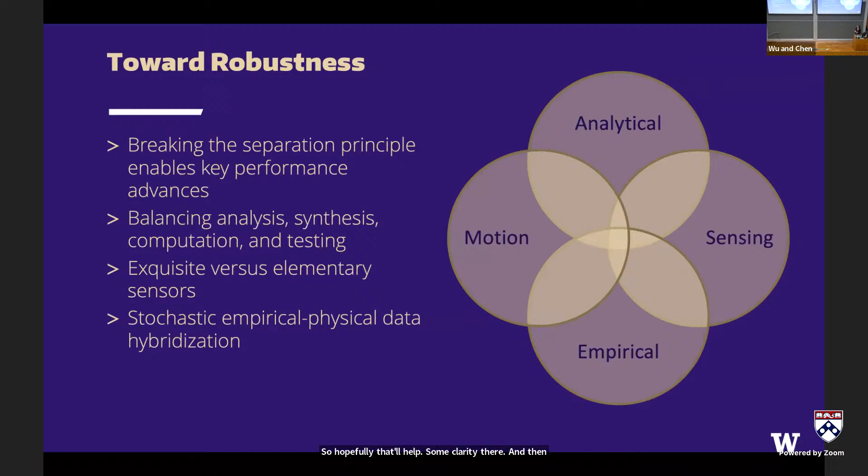And then toward the end, I'll talk a bit about how we can get into some stochastic pieces of this work. Okay, so the high level piece here is: what is observability? That's going to be the linchpin for everything I'm talking about today.

The general idea is this is our standard block diagram, feedback loop for a system. So you've got whatever dynamics model of your system right here. The state is going to come out of that in some sense. There may be disturbances coming in.

So you've got your controller you're applying to your system. Disturbances can come into that, go into the system. There may be uncertainty in the system. When you do measurements down here, there's noise that comes into that. And then you get your measurements out.

And then from those measurements, you apply an estimator or a filter or some sort of tool along those lines in order to extract back out the states. So that X hat is the estimate of your state, and that sigma is the error covariance.

That sigma is very important because it tells you how well you think you know that estimate. Because of noise, you're never going to know that estimate exactly. And because usually your measurements, there's not a direct inversion, that error covariance, how tight that is, will go back.

As you control your system relative to what you want it to do, when we design controllers for robustness, we're trying to be able to handle as much uncertainty as we can. And if you have eaten up a whole bunch of your capability with a very messy estimator, so your sigma, your error covariance is very broad, you're going to eat into your uncertainty.

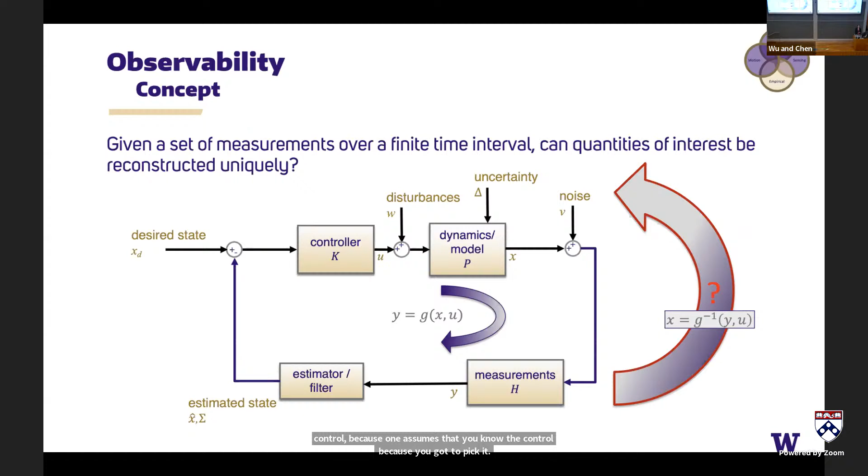Okay, so how does this work? I'm going to go through some of the mathematical pieces here. This is an analysis thing, and this is just looking at the sensing side of it.

So that's why the little bubbles are colored over there. Again, it's the first time I've tried little bubbles. We'll see how it works.

So in a linear system, this is your standard continuous time linear model here: X dot equals AX plus BU, and Y equals CX.

One way of thinking about observability in these systems is if you start taking derivatives of your measurement, these numbers represent the number of derivatives you've taken, and just write out what these equations look like. So the first one's just Y equals CX. This X is the piece we're going to try and extract out of the system.

Take a bunch of derivatives, gather up all of the coefficients of X, and then shove all the other stuff off into this vector on the right. If you notice here, all the things in this right piece, we know all these things, assuming you had some idea what your model was at the beginning and that you chose the control. And then we also assume we know the measurements because we measured them and took derivatives.

So if you had to do that numerically, that is totally fine. We assume we know the C and CA and all of that there. So the one thing we don't know is the X. And observability in linear systems, regardless of all the different tools you may have seen, kind of boils down to this in a certain sense.

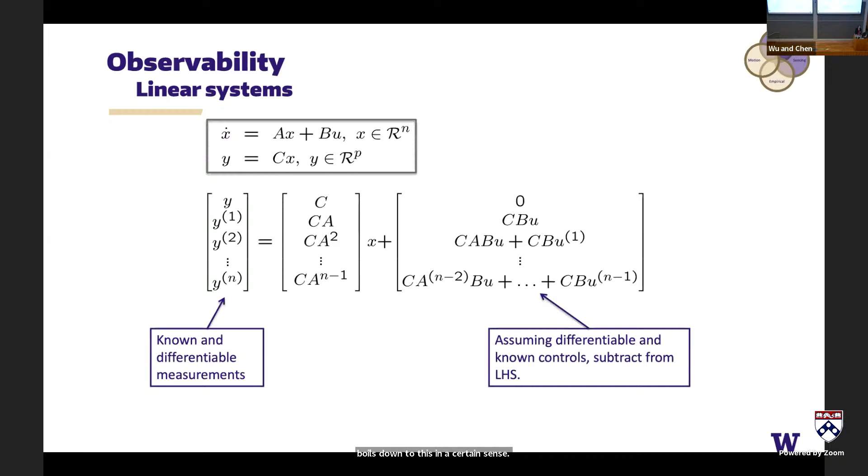So those pieces are known. These things, we assume, are known. We assume this is known. And so then we just want to know, can you invert this relationship? You can subtract off this vector on the right from the left.

And then it comes down to, does this matrix here have full rank? Because if it's square, you might be able to invert it, but usually it's not square. So all of the pieces there, nothing here depends on or is affected by whether or not the system's controlled in a particular way, because you're just subtracting that piece off. So when we talk about linear systems, there's what's called the separation principle: how it's controlled doesn't have any impact on whether or not you're able to extract the states out of the measurements.

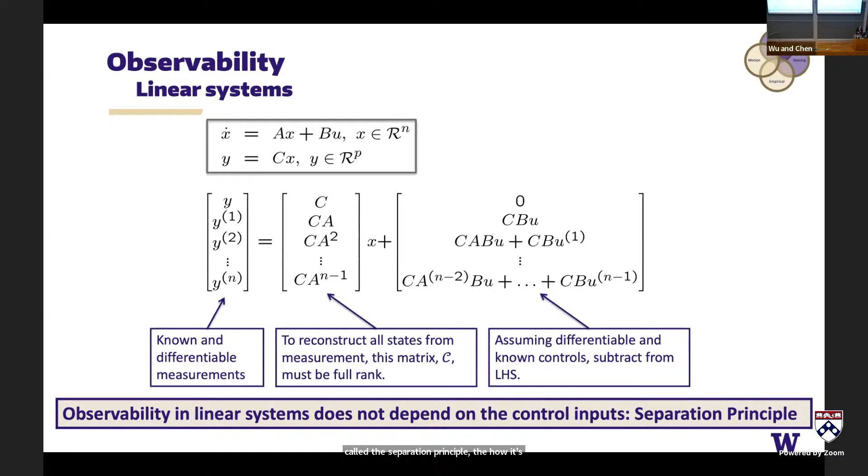Okay, so it's a little bit different in nonlinear systems. This is where I've got that other bubble colored in, because the control may matter. So...

If you write down dynamics in a similar way as with the linear system, except now I'm going to frame it a little differently here: this is like the AX in a linear system, this is called the drift in a nonlinear system, and these pieces over here are the controls.

This is like BU if you pull it apart in similar structure, except that the elements of what would have been your B matrix in the linear system may be state dependent, and may also be time dependent. So you can break apart these pieces here. Often you'll see it written this way, or you can lump them all together into one big dynamical systems vector.

And then you're going to have measurements. The measurements are often going to be state dependent. A good example of this is in a robotic system, we often have sensors on board getting body-fixed measurements because you've got a camera on board. That's getting measurements relative to the motion of the system, so that's going to be a function of the state.

More broadly speaking, if you go through, as with linear systems, a similar process of taking these time derivatives of the measurements, you'll get a structure that looks like this vector here. So this is just taking time derivatives, and it works out to look like this when you do your full derivative. If you then write this in terms of this function f, then you can rewrite these.

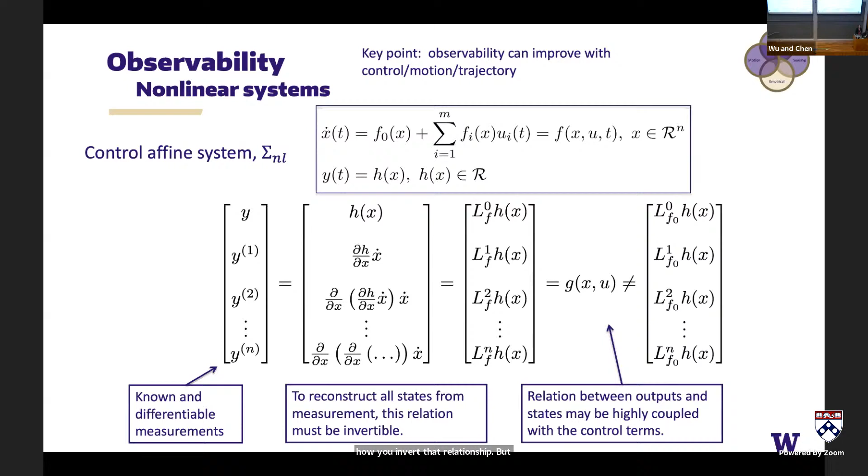Going back to that first diagram, there are some tools around this. It really boils down to when you locally look at that function at some point, you take a Jacobian of it. And if the rank locally is full rank, then you're good to go and you can invert it. So that's boiling down a whole lot of math into that.

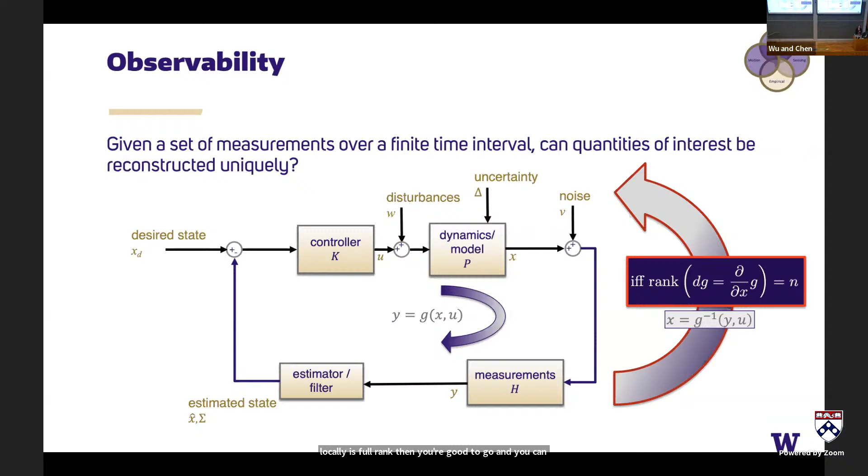Let's see that a little bit in action. I'm not going to show all the calculations of the different ways of calculating that local representation, I'm just going to show you some examples. So one that we can actually do the analysis on - and that's why I've got the analysis and the motion bubbles in here - if you look at a very simple model of a drone.

This one here is the Aerosonde. It was the first autonomous vehicle that flew across the Atlantic, from Canada over to Scotland back in the 90s. And it had, no joke, like the equivalent of a lawnmower's worth of gasoline in it. Very seriously, I think they sent about 5 of them and 2 of them made it, which is mind boggling that it actually worked.

Particularly since the sensors they had on board - they had differential GPS, but they didn't have wind speed sensors. So you've got a GPS sensor on there, but you have no idea what the winds are doing. And this thing is small and it's going across the Atlantic. I think they did it when it wasn't awful bad weather, but still.

So the way that, if you stop and think about it, you can figure out doing course correction from the wind is you can do these sweeping motions and get some idea of where the wind pushed you. So those sweeping motions are in effect this very need for doing motion in order to get observability of the full state.

So if your full state is, just thinking of it in the plane, although you can do it in higher dimension, your position, your heading, and then the direction of the wind - the X and Y, lateral, longitudinal wind direction - put all that into a model, so a 5-state model, which is about as simple as it's going to get. Write down just very simple dynamics so you can control velocity of the vehicle, and then the heading. That's basically what you get with a drone of that type.

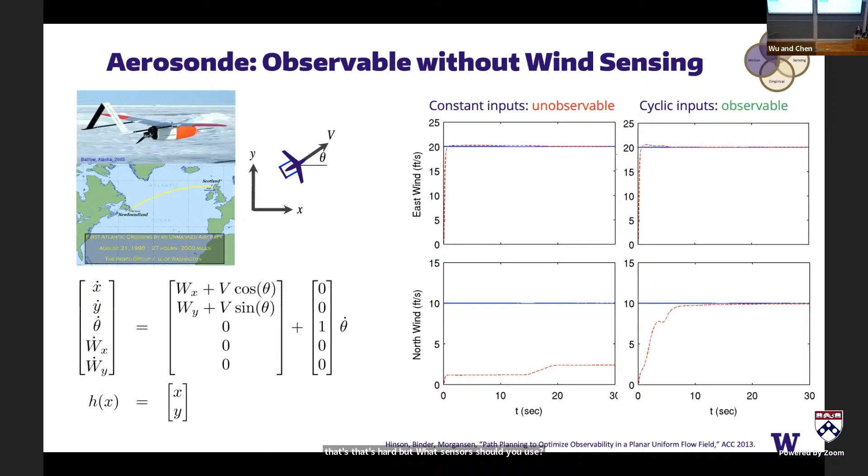Where should you put them so you make this locking on of the estimation as quick and tight as possible?

So some of the things that come up with this tool - up till there, it's pretty much analytical tools. I swept a whole lot under the rug about how do you even do these calculations. That one example I gave you was a 5-state system, and even with that one, it gets pretty complicated to do the analytical math on it. Real systems are not that easy.

So the two I'm going to show here, and I'll talk about the ways we're looking at handling each of these. The one on the left is talking about analyticity. Those models I showed were differential equation-based models, and in order to use the tools, you have to be able to take derivatives of your system and evaluate those derivatives at the points of interest. In a lot of systems, you can't do that.

So in this one here, this is completely something different. This is a classification problem where you've got people or cars moving around or both, and you're trying to figure out what's where. That is not usually written out as a differential equation or anything of that type. And so trying to use these tools, which actually do have application here, where you're trying to extract out from this camera image what are all the objects - that particular observability tool won't work. Just it's not built to.

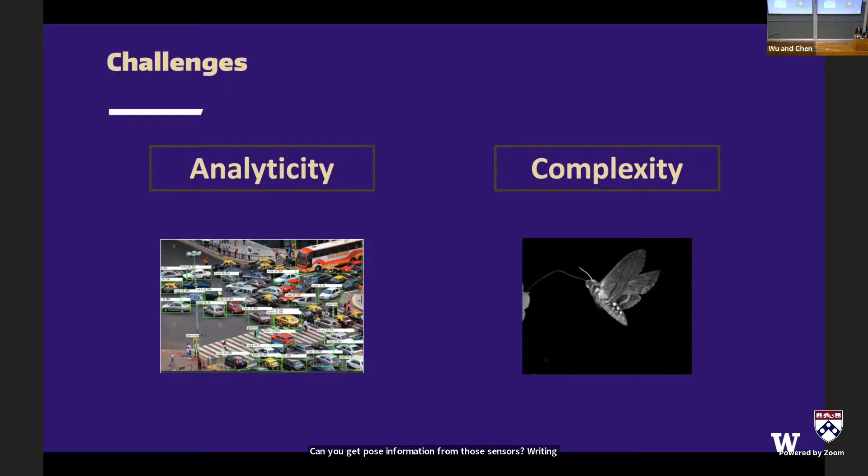And then there's complexity. If we get beyond a sort of simple set of those kinds of descriptions of a system, what do you do? I'll talk more about this one here. So this is a hawk moth flying around. And what we've looked at with biologists is they have strain sensors built into the wings, like 200 of them in each wing. Can you get pose information from those sensors? Writing down the dynamics on that is really hard. So what do we do?

One thing you can do is do a local linearization about a nominal trajectory and then evaluate that local linear system. So this is an analytical piece right here. All of this you may have seen in a class you took on control theory. The parts I want to point out - so this is what you get.

So you have this nominal trajectory here. And this is a bad notation thing - often we refer to a system as sigma, but that's not the same sigma as in the error covariance. But you get this linear system here. It's often time varying, because when you linearize about a moving trajectory, you often end up with a linear time varying system.

It turns out your nonlinear system is going to be locally observable about that trajectory if this matrix W down here - if you look at the output energy of your system, so 2-norm of your measurement function, it expresses out like this in a linear system format. And so this whole integral here in the middle, which is from your start time until when you stop taking measurements, and then you're going to extract out the state at time 0 - if that integral, which is a matrix, is full rank, that's called the observability gramian. If it's full rank, then your system is locally observable. That's an analytical result for local nonlinear observability.

It turns out you can re-express this whole gramian here as a sensitivity function - the sensitivity of your measurement relative to that initial state, which is really what we care about. Think about that: if your system's observable, it's going to be very sensitive to that initial state, meaning that if you change the state, you will change your understanding of the initial condition. If it's not sensitive to it, you can make that initial state whatever you want and you're going to get the same output. That means unobservable, because multiple things are giving you the same answer. So we want high sensitivity here in order for our system to be well observable.

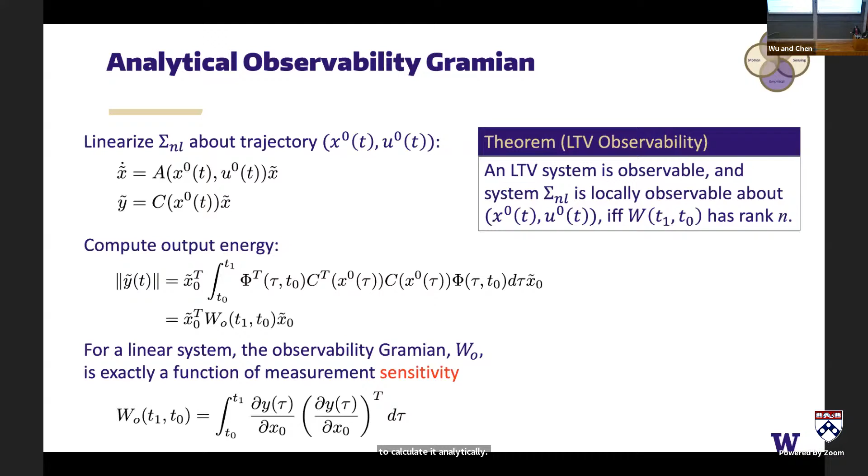But having framed it in this particular mathematical structure, we can actually construct this sensitivity using numerical tools and then get a version of this gramian using simulation rather than having to calculate it analytically. It's a trade-off between having to do a whole lot of math you might not be able to get a solution for, versus having to run a whole bunch of simulations.

So, no free lunch anywhere, but it does make progress. These are tools like this empirical gramian that was developed by other people. Some of it came from doing model reduction. Sanjay Lall and company did some work on this a while back, and Art Krener also did some of the underpinning development here.

So we didn't develop this ourselves. We've built some things on top of it. I just want to make sure people understand it.

So what you can do is with your nonlinear system, you start with that nominal trajectory, and then you perturb your initial conditions plus or minus epsilon, a little bit in each of the basis directions. That's going to give you some perturbed trajectories. Then you write down what is the delta in each of the measurements from those perturbations, and you can form a matrix out of that. That gives you an approximation that, as your epsilon gets small, gets close to accurate of the gramian of your system. And now you've got something you can do checks on rank of that matrix.

Okay, and so this, again, Krener did the result here. We have built on top of that with other tools. So, sorry, this is actually our result. But the initial stuff came from Krener, and then we started putting some foundational pieces on it, including adding those controls back in.

Now, a really important point here, and this is something that is driving a lot of what we do: if you remember when I said that error covariance is very important for maintaining as much robustness, control robustness, in your system as you can, well, we know that the error covariance of your system is going to be bounded by the Fisher information matrix. That's a well-known thing. It also turns out that in a linear system with Gaussian noise, you can bound the Fisher information matrix with the observability matrix, and in particular with the gramian here.

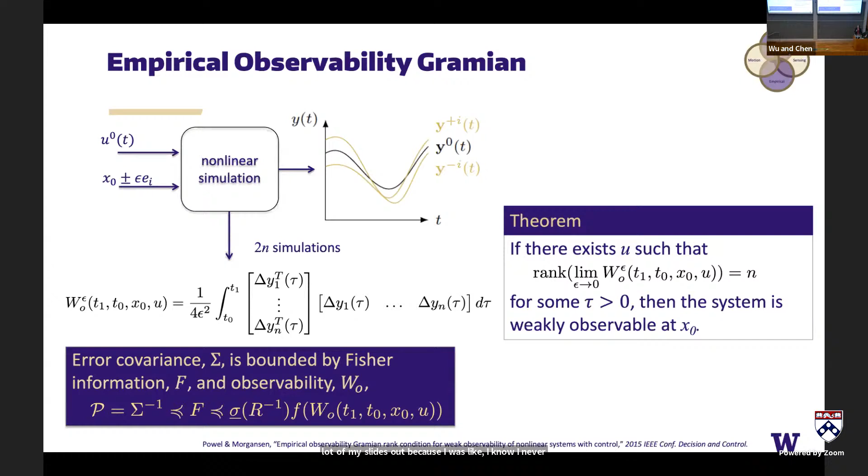I actually took a lot of my slides out because I know I never have enough time to get down in these rabbit holes. Okay, I'm gonna have to remember that — I didn't write anything down.

Anyway, going back to this, I'm just gonna reference this picture one more time. So what we have been looking at is knowing that in a certain sense, observability is a bound on your error covariance. What can we do to tighten everything up and get the best results possible? And so 'best' of course brings to mind an optimization challenge, which is the direction we go.

I will say there are lots of open questions here. I think one of the things I'm hoping to get out of my visit here is some opportunities for collaboration, because there's just a lot of different directions we can still go with the things we've been doing here. One would be that we have not yet quantified in any way, in whatever application, that relationship between observability and something precise about robustness. If we knew something about the particular structure of your observability, then we could say something in some particular example about the robustness margin relationship.

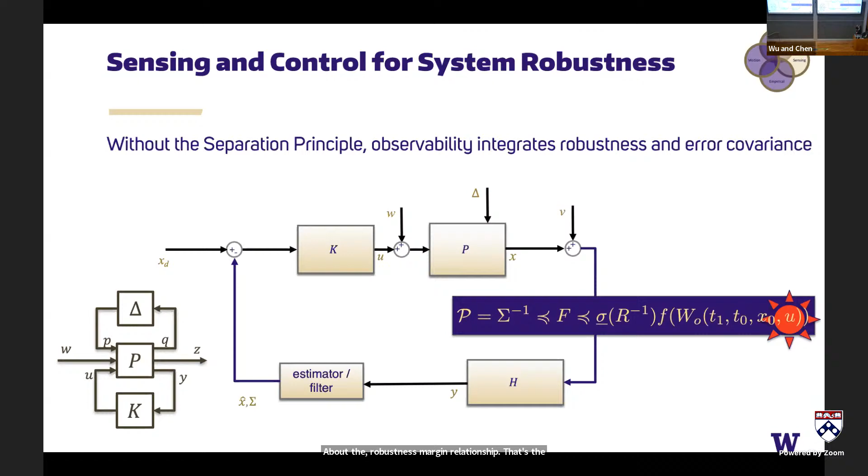That's the dream, particularly since in most of the cases here, control is going to matter. So some of the questions we look at, and I'll talk about applications and results we have for a number of these: what motions are necessary for observability? I talked about that a little bit at the beginning, like with that drone example.

The ones I'm going to talk about mostly next are what sets of sensors is best. A lot of the applications we look at have many sensors — like that hawk moth, there's 200 strain sensors on the wings, each wing. Which ones should we use? What's the best position of them? How many? And then there are metrics, because when we're going to do some optimization on this, there are different metrics that have different results.

And then I just mentioned controller robustness, and then how much can you determine analytically versus empirically, which I think goes back to your question about being careful about those boundaries of what you're assuming you know exactly and what you just don't.

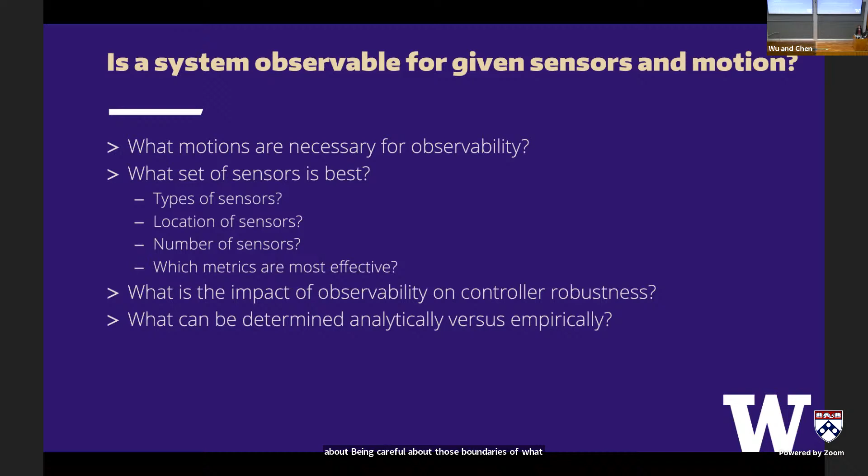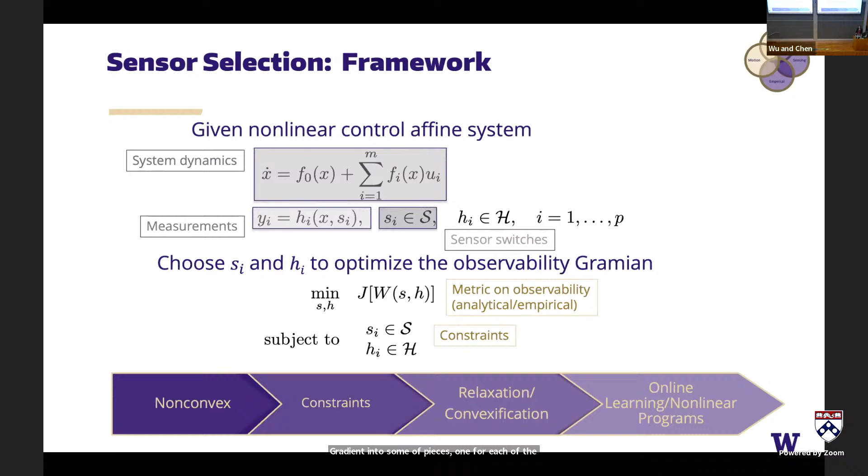Yeah, so we set it up like this: we put switches, so we had those 200 blue boxes on the wing as potential locations. We set up the whole thing where you can actually break up the observability gramian into a sum of pieces, one for each sensor. You add all that up and get this big cost function. I don't remember off the top of my head which metrics we used, but I think we tried probably all of them - it was probably log det, looking at the volume of the estimation uncertainty, minimizing that.

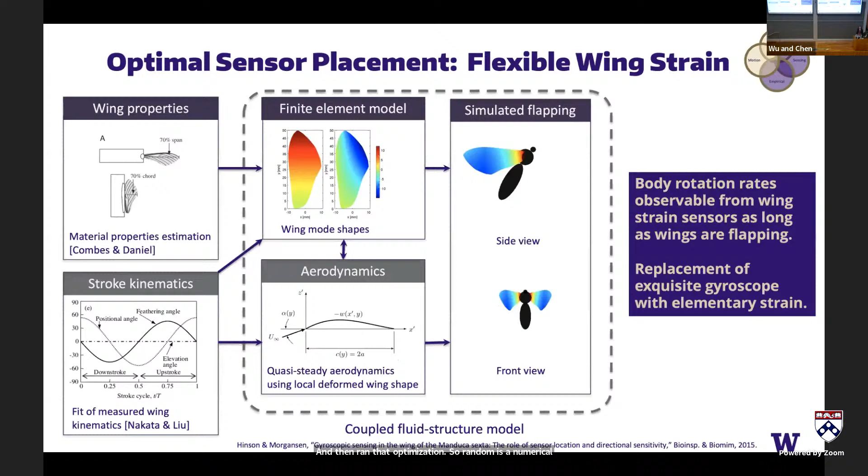And then we ran that as a numerical optimization, and found what was the best answer for like 20 sensors - if we limited the number of sensors to 20, which I think is the correct number there, where should they be and which type should they be?

And is this done... in some ways this is like active learning versus batch based opt. Does this give you a single placement and then you're looking for a second one, or does it do it all in aggregate?

It does it in aggregate. Effectively what it does is add up - for each sensor you can break up the observability gramian into a sum of observability gramians, one for each sensor. It's basically saying which of those are the 20 best that give you the best rank result. So it's done all at once. Although technically you could just order them by size and pick however many - but there's lots of stuff that can be done there.

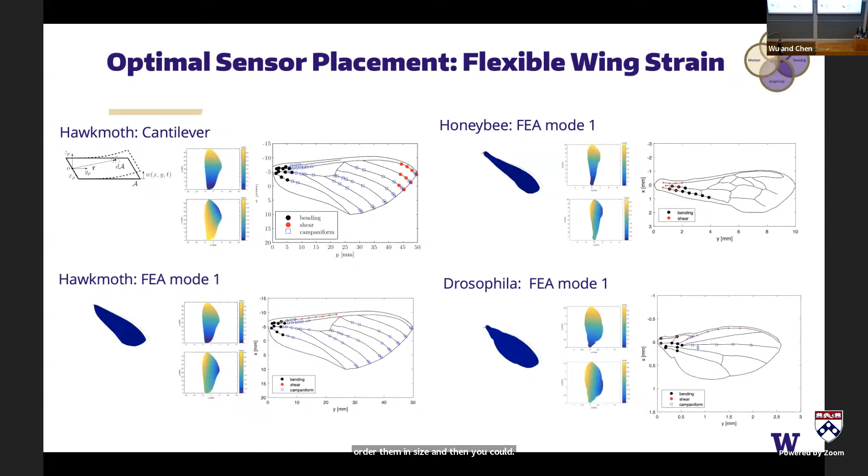So here, what we're interested in is putting IMUs into an airplane or any kind of vehicle or system, and saying can we extract information about the inertial properties of the system? We're adding additional states into the position and orientation of the vehicle to include center of mass, value of the mass, and moments of inertia.

The reason that's of interest: if you want to determine in real time things like icing - aircraft icing is a very difficult thing to identify - we're looking at whether there's information coming in where if you're tracking the inertial properties of the system in real time, you can detect something happens at the time of icing getting to a bad place where you could identify it. Is it possible to identify asymmetric fuel burn in the vehicle? You can also potentially use it for sensor fault detection - aircraft certification requires multiple sensors running, usually of different types and structures, to get the same piece of information.

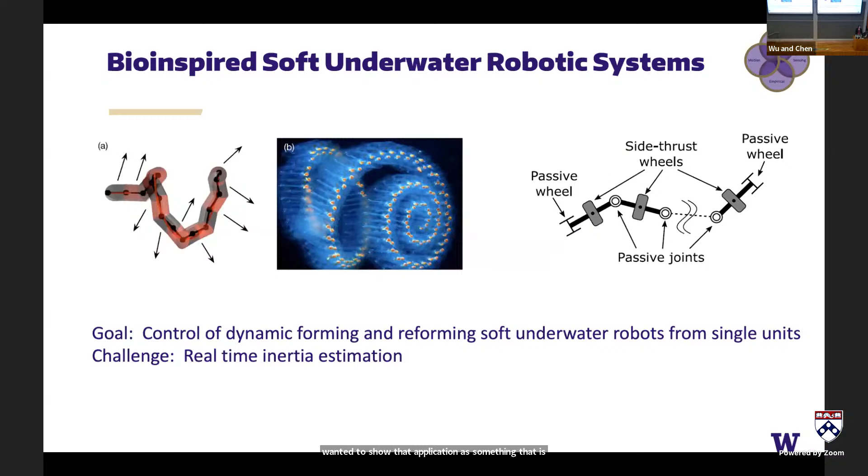I want to switch now to what happens when you've got millions of sensors, which is how I'm going to frame vision. So one of the things we've looked at is using vision to sense pose.

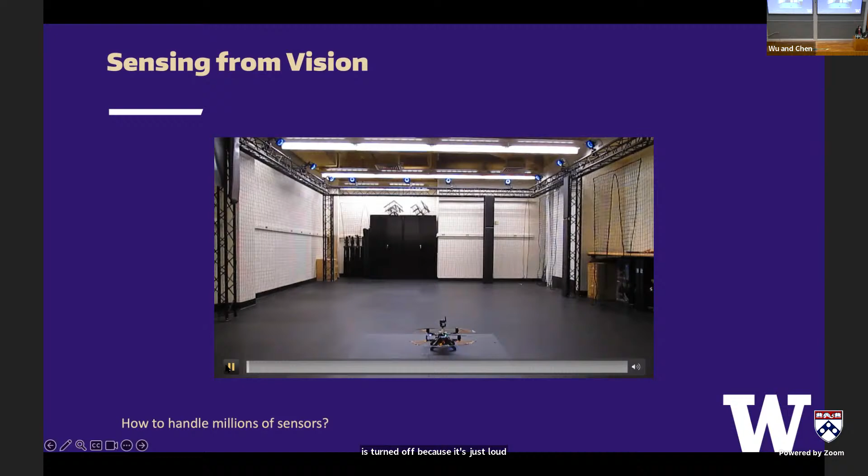I'm hoping that the volume is turned off because it's just loud. This is a drone. Hopefully that's coming through and not being too sketchy online. This is flying, and we've got one camera looking at it.

You can think of this as an application where you've actually got two vehicles and they've got a camera on each, and one of them is trying to figure out the position and orientation of an object so it doesn't run into it. This is, I think, not an atypical situation - you've got this little black drone flying around, it's got things in the room that are hard to see. But imagine this also outside, because there's all kinds of issues with drones flying around commercial aircraft. There isn't any way of tracking them, and there's all kinds of incidents. If you look at the reports, there's dozens and dozens of incidents these days of drones at commercial airports. And if you suck one of these things into a jet engine, it's not going to be a good day.

So thinking about how could we find them if they don't have transmission information on them. One of the things we looked at - I'm going to again put a bunch of stuff under the rug here - we looked at using neural networks to classify the position and orientation of the drone based on training from a whole lot of data.

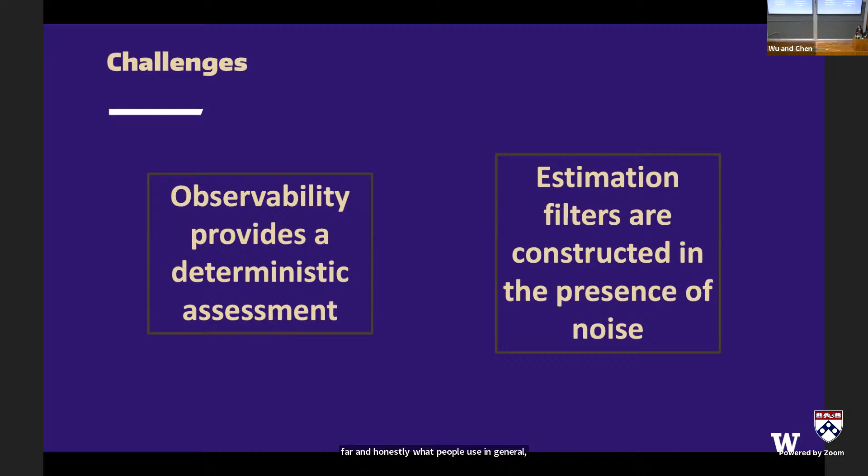Okay, switching gears again a little bit, I'm going to bring back in some of the stochasticity that was mentioned earlier. Key thing about any of these tools I've shown so far, and honestly what people use in general, is that observability is done as a deterministic assessment. So even if you have a stochastic system, the calculations, like if you go back to the classical observability matrix for a linear system, there's nothing in there about noise in the system. If you're doing this in the nonlinear tool set, again, you take off the noise and just do the calculations on the deterministic part of the system.

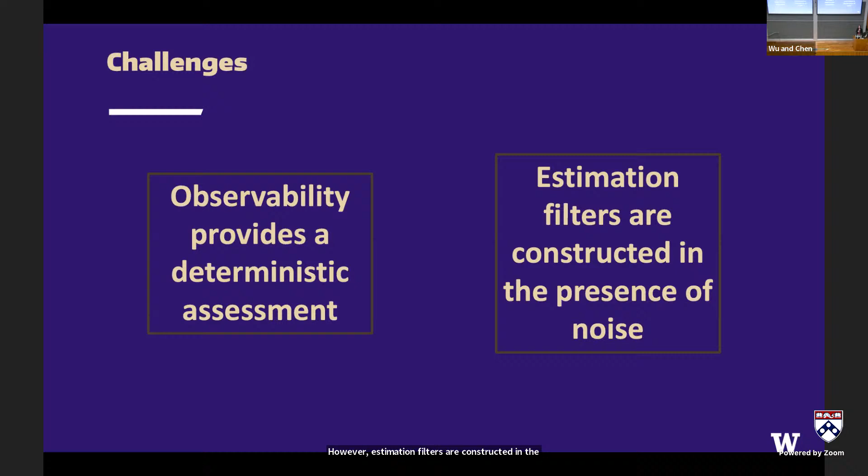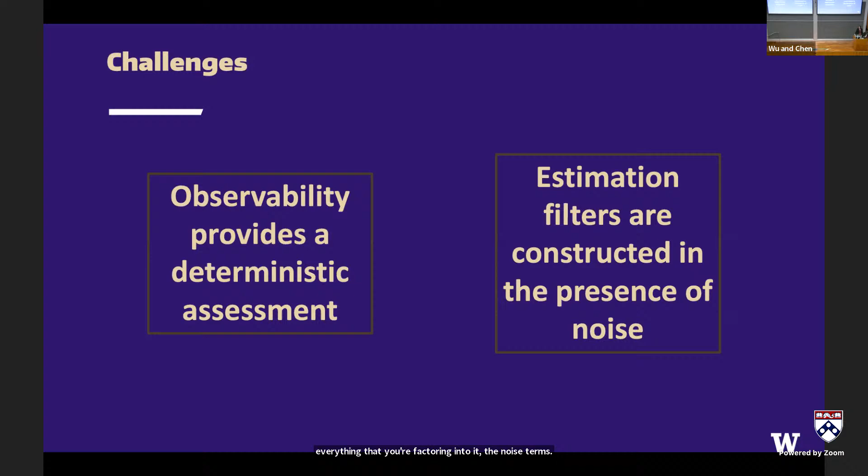However, estimation filters are constructed in the presence of noise. When you write down a Kalman filter, it assumes in the gain and everything you're factoring in the noise terms. So comparing tools apples to apples gets more challenging unless you do observability from a stochastic point of view. We have done a little bit of this. There are not a great number of tools for stochastic observability. I'm just going to give the one we have been working with.

Start with your stochastic system. It turns out you can generalize the observability gramian things we've been doing with a particular structure. Here our trajectories are going to be the same kind of thing, plus or minus epsilon, but now your initial conditions lie in a probability density function, which allows you to get some of that stochasticity in there.

Short version is yes. With this Dubins vehicle, we were able to show that if you have just generic noise in the system—I don't remember what the parameters were, sorry, I should look that up—as long as the system is moving, there is enough noise in there to provide the excitation needed in all of the directions in order for the system to be observable. There's a lot more that can be done with this; it was just a particular simple result.

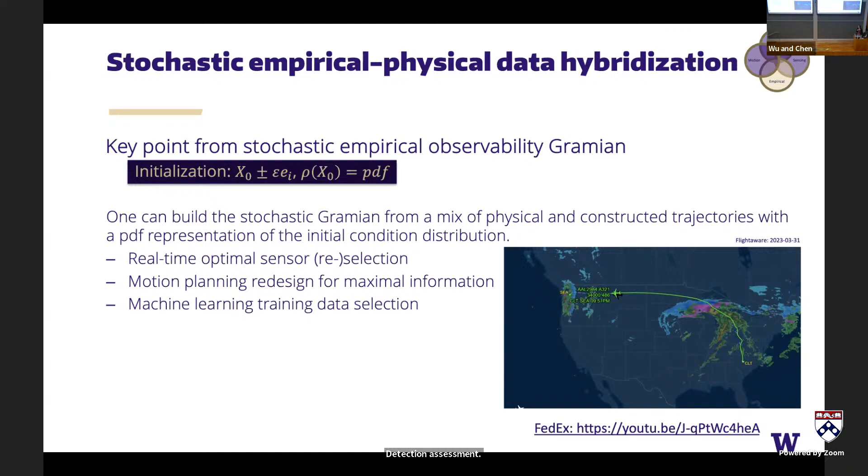I apologize, I don't want to be controversial, but I am taking issue with your definition of observability. Observability is not the physical reality, it's only a reflection of the physical reality because of the transduction. But your statement was much stronger - that's what triggered me to take issue. If I remember, you said... I forget... observability is the detection assessment. Can you go back to the first definition, when you started with the issues?

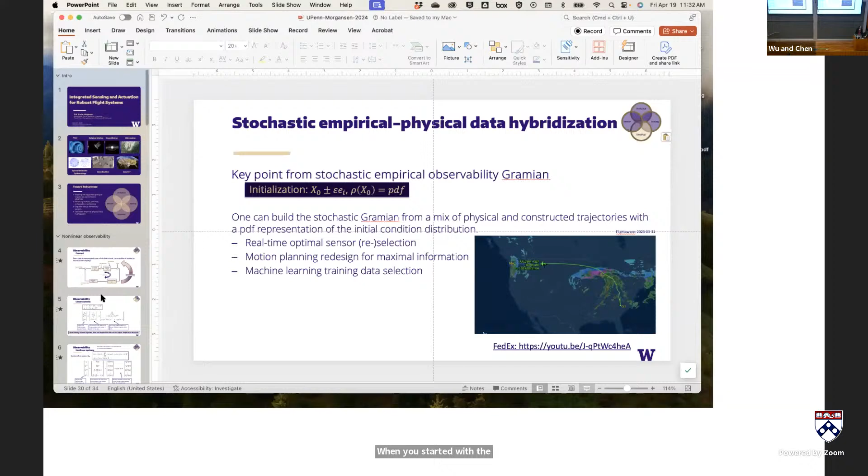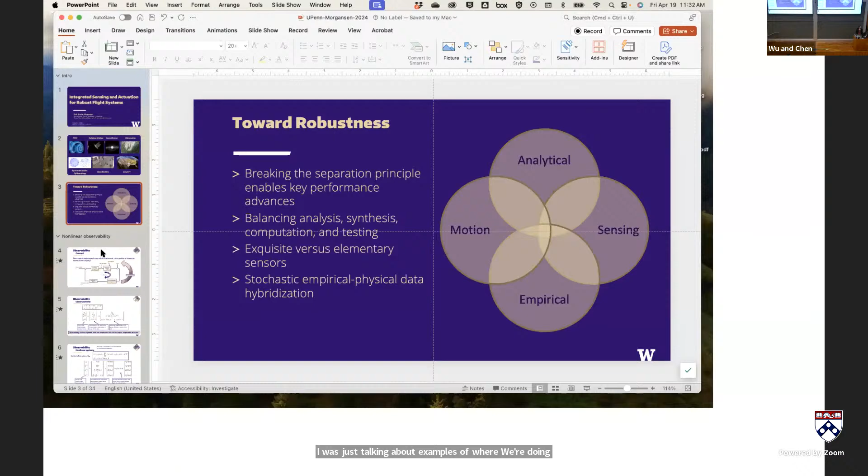Like here - yeah, before that, one more - this one, or one more maybe? Well, this one I was just talking about examples of where we're doing things. This one was like just some of the questions - I missed it, but in any case, it is really not the reality.

And this is the dangerous thing about all this great belief in AI, and the data. The data very much depends on the transducer, and how it affects the reality. So I think the difference between what I'm saying and there is a myth - I would like to be able to get that message across. From the National Academy of Medicine, and in the medical area, this myth is so dangerous.

So let me frame it this way. When I'm talking about the observability tools, this is from the mathematical control theoretic point of view - a mathematical definition where observability means you have this, which is deterministic in general, and that when we say observability, you can extract from the measurement the state. In reality, you never have a deterministic system. So I 100% agree that when people say 'I can extract the state from the measurement and I'm going to call that observable,' technically that's not the same observability I'm talking about with these mathematical tools - that is more of an implementation question. Can I physically in the real world do that inversion and know that it is correct? That is absolutely a very different thing.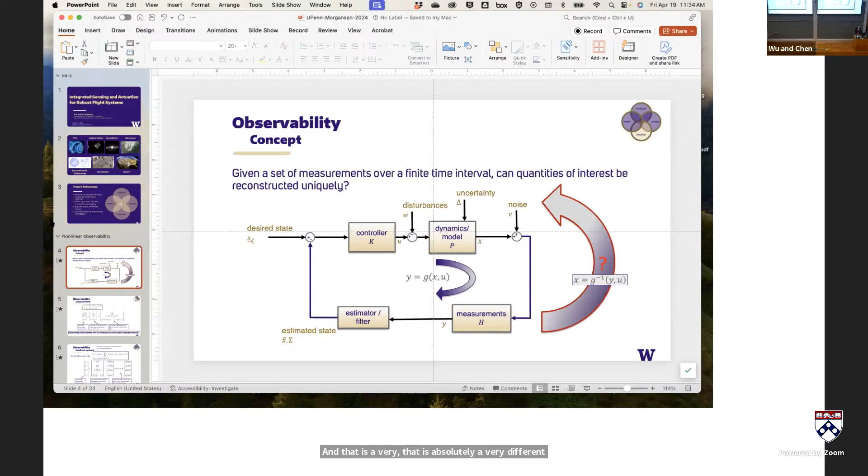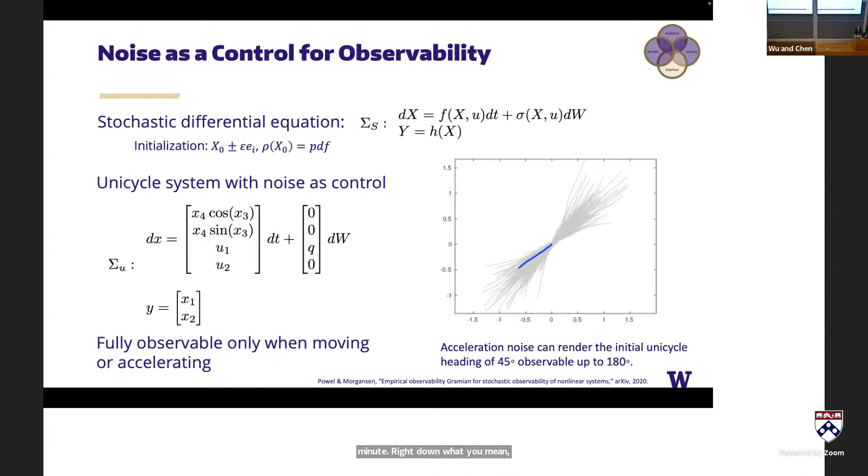Yeah, I don't disagree. And that's I think where there is a lot of - one of the things I love about collaborating with people, and I've worked with biologists and various people from the beginning of my education - one of the hardest things is to get everybody on the same page on language. I distinctly remember a conversation with one of my fish biology colleagues where we were talking about models of schooling fish, how they interact with one another. What she meant by an elastic interaction was the opposite of what we mean from a mechanical engineering point of view. It took hours to be like, wait a minute, write down what you mean math-wise. And it was like, oh, that's not the same. So vocabulary matters hugely.

So does punctuation. I have this t-shirt I got from my husband and my son that says - it's a dinosaur, and it's the one that says 'let's eat, comma, kids' - let's eat kids. Punctuation saves lives. I have a 13-year-old, so he is less interested in commas than I am.

Anyway, so one of the applications here - and I realize I'm up against the clock - I'm not going to play the video, but this is FedEx. If you've ever seen videos of their fleet taking off at 2 a.m. out of Tennessee - I forget exactly where in Tennessee, I don't think it's Knoxville, can't remember where their hub is - when they run up against a thunderstorm, it gets super exciting and they have to navigate around it.

From an observability point of view, a physical observability point of view, it's about knowing the weather well enough to steer around it and predict what it's going to do over time, so that you can get the most efficient pathways to go around it.

There's this one video that's super fun because they were actually telling us when we were talking to them that there's one pilot who likes to go into the thunderstorms. So you see this one rogue airplane doing weird things around thunderstorms. Don't recommend it.

I don't think they actually really like it, but what do you do once they're up there? Okay, so just as a summary, there's a lot of open territory of things that can be done, both with development of these tools from a mathematical point of view, but also with applying them to different kinds of systems.

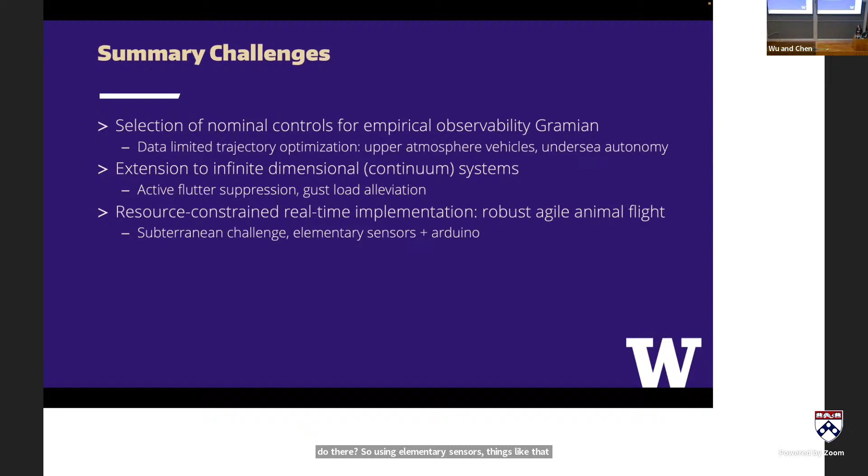And with that, I will end and take any questions, take more questions.

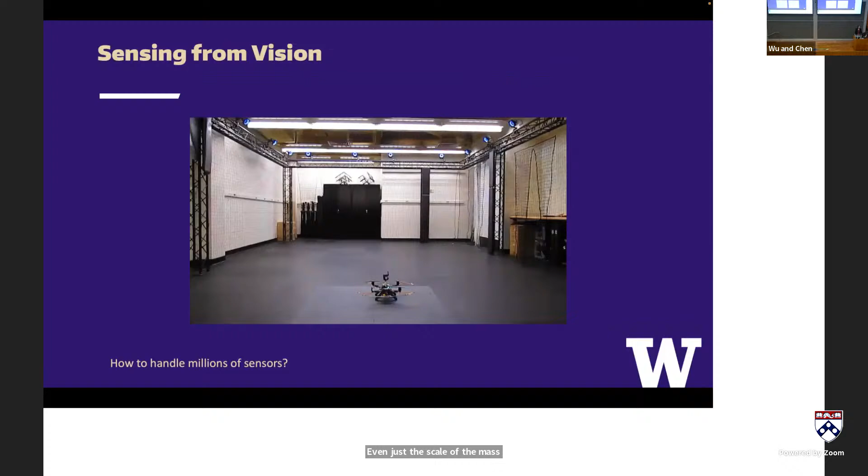I have a question about your project where you put the different IMU sensors on different places on the plane, and you were able to resolve the inertial properties of the plane. What other inputs were there? Because I'm struggling to figure out how motion information from IMUs can discern even just the scale of the mass and the center of mass. Are you including information from other sensors?

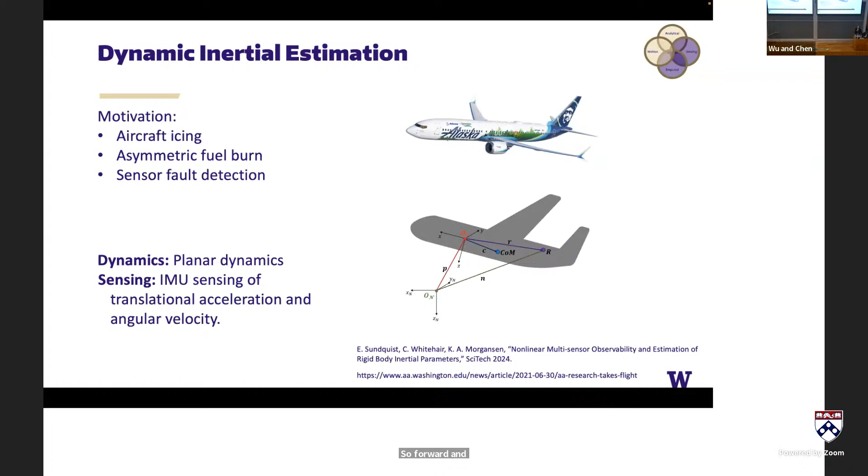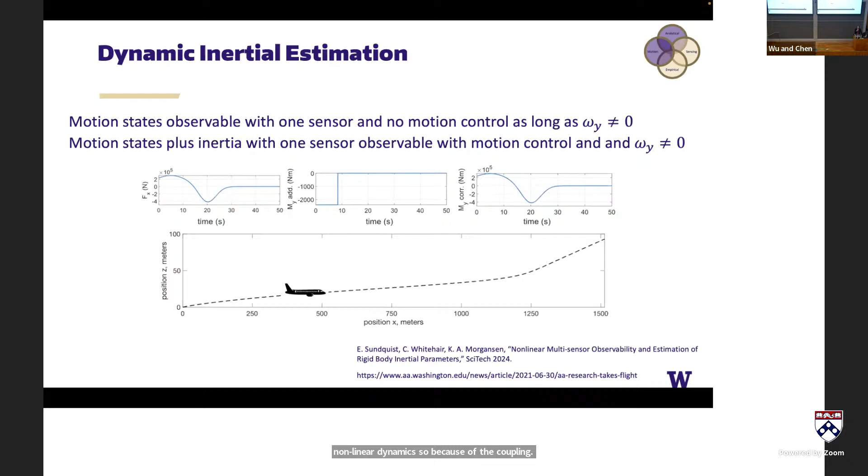First of all, full disclosure, none of the data I showed are from Boeing, just to make sure we're NDA compliant. So the information we get is translational acceleration. This is a planar model, you could do it in 3D, it's just harder. So forward and sideways, forward and up translation, and angular velocity, so pitch velocity. Those are the three things we're measuring. And because this is nonlinear dynamics, because of the coupling of the dynamics, I didn't put them on here, but just having that information is in fact sufficient.

As long as you put sensors in appropriate places and run an appropriate filter, you can actually get out all four of those. But do you have a dynamics model? Yeah, absolutely. Almost all the things I do are with dynamics.

So I was interested in the sensor optimal placement. In the biological system, is there an understanding of the additional sensors in terms of, is it a notion of redundancy, is it something else? And if so, can we also optimize over that?

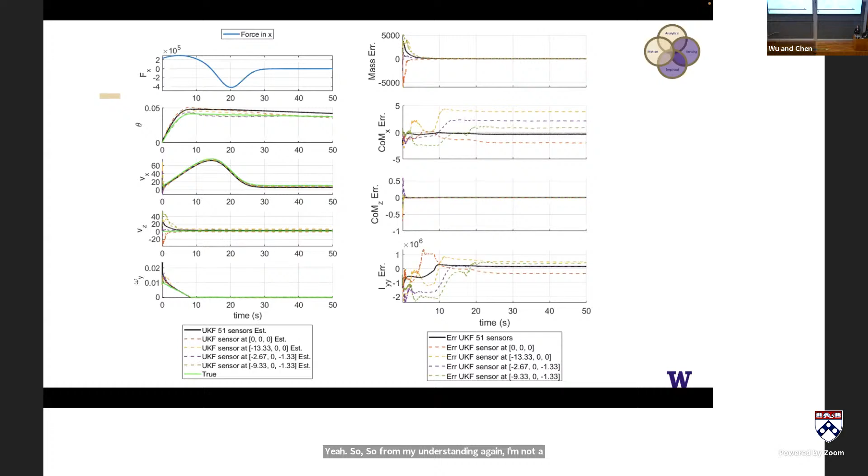From my understanding, again, I'm not a biologist. Let me see if the picture has like... that's not the hawk moth. Let's go back up. So they have... I'd say it's an open situation. They don't exactly know what all is going on.

The insect has vision, it has strain sensors. The question was what could they do with those strain sensors? We don't really know. The only way you can really know, and I don't think these studies have really been done, is to ablate the sensors and then see if it can still do the same task.

That's the thing about biology. The problem is, if you ablate the sensors on the wings, you probably destroyed the wings, and then it's not really clear. So it was more a question of, is it possible that this is what's going on? Because we know that they don't have an inertial measurement unit.

Some of them, like some kinds of flies, to a certain extent this is present in all of them, they have this hind wing. A crane fly has this vestigial hind wing, which is basically turned into a proof mass on a rod. So when the wing flaps, this proof mass moves, and so maybe it does actually have an IMU on it.

But these don't really seem to. I think the key thing with insects and most biological creatures is they have so much redundancy. I think that's because things break over time and they don't get new sensors. It's not like they usually grow new ones. So it's interesting to see what could be done with those.

A lot of these studies are being done with biologists informing what questions could then be asked. So we don't really know.

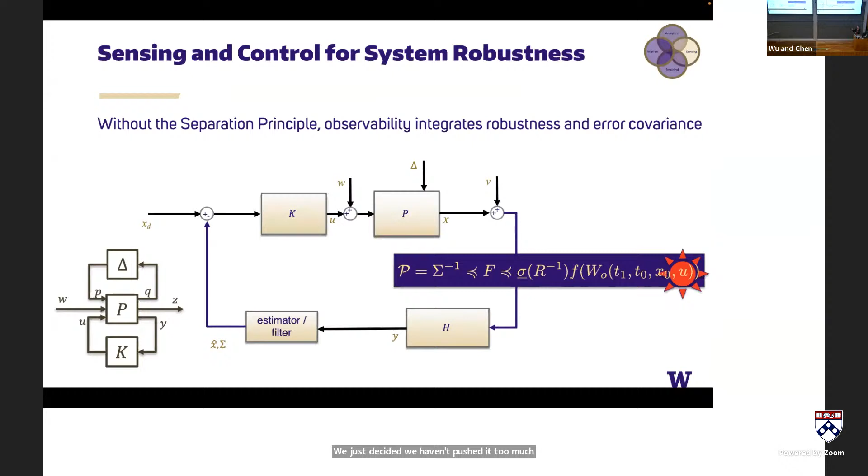Yeah, because it comes out... what we did, wrong way. We just decided, we haven't pushed it too much further than this, to add, like you're saying, another cost for cost of sensors. We just decided to put a limit on it. We know that there's 200 on a wing, and clearly that's a lot.

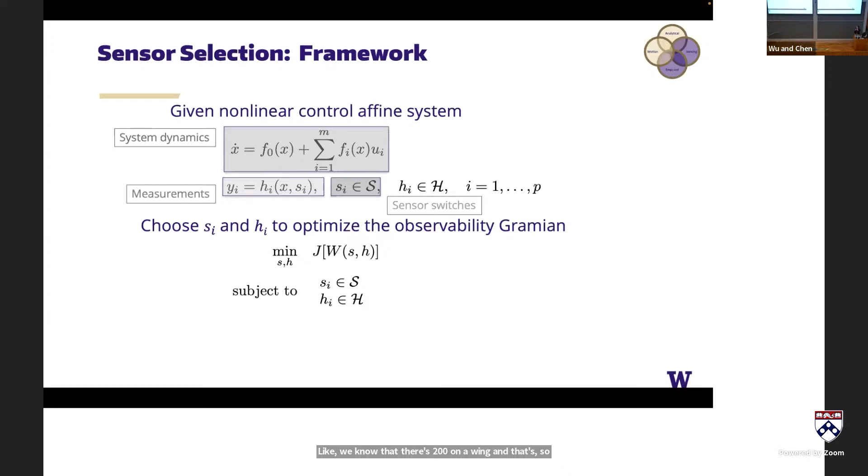And we don't think that they're all active at the same time. That is one of the questions the biologists are looking at, trying to get measurements of the spike patterns. You have to be able to get into the nerve bundle and figure out what's spiking. So we just said assume that there's like 20, an artificially chosen number, so this one was done with 20.

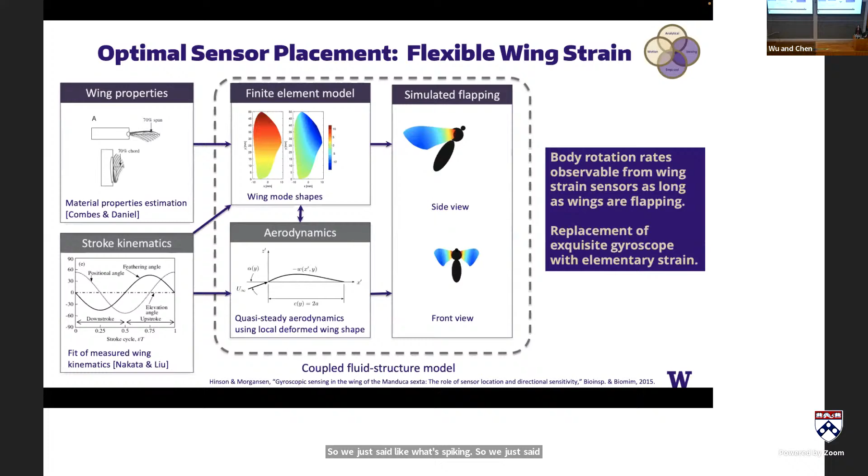Next page. I think some of these, yeah, I think they were all done with 20, but we did it with different numbers. The number, we said 20 total, whether they came out as bending or shear. I'll say the bending come out first, and I think that's just because the root of the wing gives really good, strong information there. But as we added more, we went to 20 because it took a while to get some shear ones showing up. But yeah, that is another thing that can be done.